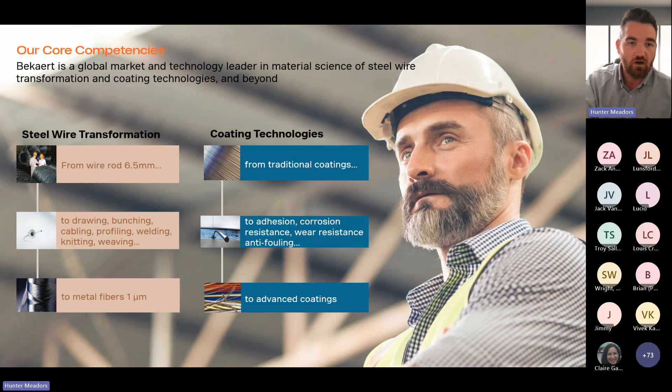Some of the biggest are in tire reinforcing, so the steel wire that is in tires for your cars. Bekaert does a lot of that, to the tune of about a third of all the tires on the road globally have Bekaert wire in it, all the way to the construction world where we all operate in the steel and roadway reinforcing, plaster reinforcing, masonry reinforcing. I've got a slide on that here briefly. So all over the place, all steel wire transformations.

To give you a little bit of the scope and size of Bekaert, in 2023 we reported consolidated sales of close to $5 billion with an EBITDA of 434 million in 2023. That's operating in 130 countries with 75 production plants scattered throughout and about 24,000 employees around the world.

How that shakes out on the map: here in North America, we have 9 production plants. We also have some offices scattered throughout the United States and Central America. And we have one manufacturing plant in the US that specifically manufactures our Dramix steel fibers, which is relating back to the tool. That is the steel fiber choice that you're going to have when you're designing in the tool. We do have a manufacturing facility in Tannersville, Pennsylvania, sort of the Scranton area, that manufactures our steel fibers there.

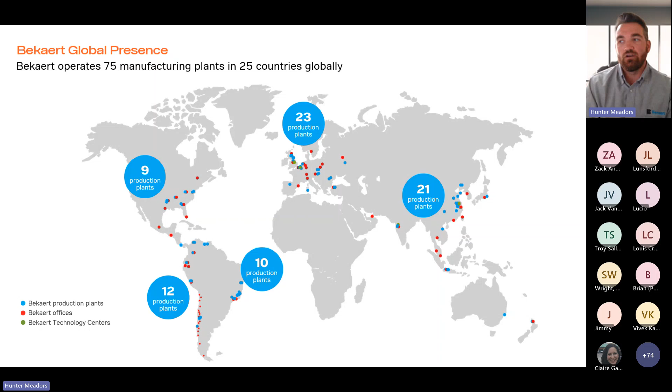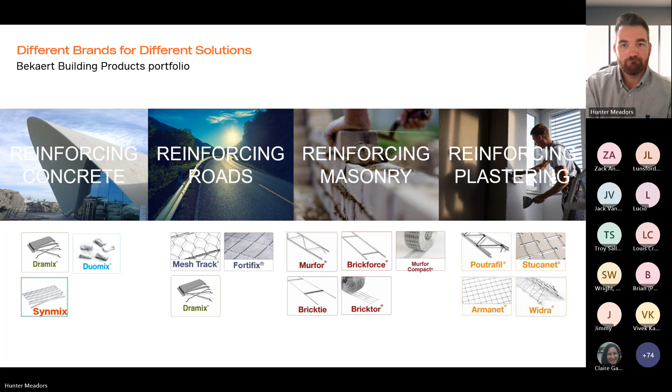Now, I mentioned that the construction building products portfolio of Bekaert is not just limited to reinforcing concrete. We also can do roadway reinforcing, masonry reinforcing, plaster reinforcing, and the like. But this tool that we have rolled out to the market specifically revolves around Dramix steel fibers for reinforcing concrete applications. So with that, let's talk a little bit about Dramix steel fiber concrete.

So the principle of concrete reinforcement, we're taught this if you took concrete classes back in college. You're taught that concrete is very brittle and is not really worth anything when it comes to carrying tensile stresses and tensile loads. It is very low ductility. When it's subjected to those tensile stresses, unreinforced or plain concrete will ultimately crack and fail once the loading exceeds the cracking moment of the concrete.

So how do we change this, right? Well, we add some level of reinforcement to the concrete matrix. This could be either a mesh, this could be a rebar, or in our case, steel fibers added. Our goal there is to simply increase the load-bearing capacity as well as limit the crack opening of the concrete. That is our goal for adding reinforcement to an otherwise very brittle material.

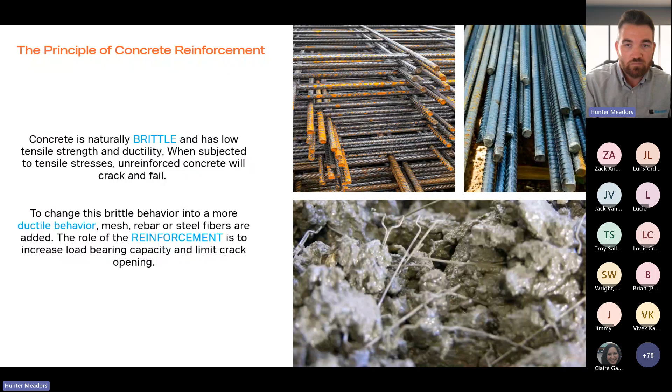Now, steel fiber reinforced concrete is a concrete that has a homogeneous distribution of randomly oriented, discontinuous, discrete steel fibers. What that means is there's a bunch of individual fibers anywhere from 1.5 inches long to maybe 2.5 inches long, scattered throughout your concrete section, oriented all different directions, and you achieve what we call 3-dimensional reinforcement. The entire length, width, and depth of your concrete matrix has reinforcement throughout.

Now, when you're talking steel fibers, this is a direct swap, steel for steel, fibers for your typical steel wire mesh or your rebar. But you're going from a continuous reinforcement in the case of rebar and mesh to discontinuous. The fibers are individual pieces, again, a couple inches long, scattered throughout your mix with an even distribution everywhere throughout the concrete. And that is the design principle and basis that the tool is using in its designs. So that is, in general, the big picture. What is steel fiber reinforced concrete?

But when you go to design, what we're trying to find ultimately is the bending moment capacity of our concrete sections to carry the loads, whatever we're trying to input into this tool, so that our projects go off without a hitch. So how do we go from evaluating concrete with fibers tossed in to ultimately providing bending stress values for you to be able to stand by your designs?

Well, we cast a bunch of test beams with our steel fibers in there. And along with some ASTM tests that we do run, the industry standard in our world is the EN 14651 beam test for flexural strength of steel fiber reinforced concrete. The EN 14651 test is a simply supported beam. It is loaded at the midpoint. And if you notice on the picture there, there's a notch that is sawn into the bottom of the beam.

What we're doing there is we're ensuring that ultimately we want it to crack there, but we are also going to take that notch and we're going to measure it as we load the beam, and that notch is actually going to open wider. It's going to displace. So we take readings of the corresponding stress that's being applied to the beam. We take the reading of that stress at benchmark openings of that notch.

They're in millimeters. I'm trying to get them to switch to the good old US units. It's a tough sell, but in 0.5 millimeters, 1.5 millimeters, 2.5 millimeter, and 3.5 millimeter opening displacements, we measure what the stress is corresponding to that opening. Those give us what we call our FR values. There are 4 that we gather, one at each of those benchmarks.

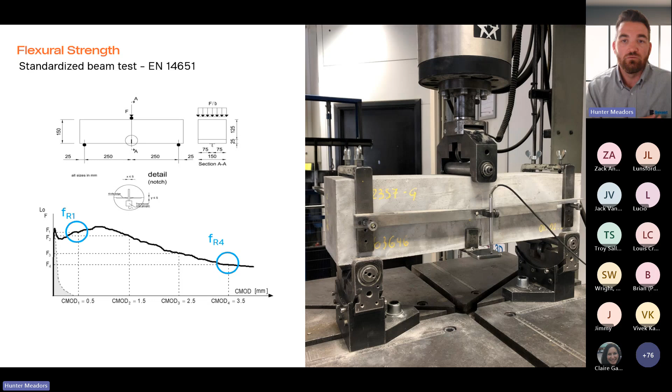So we take those values and we measure them amongst the different fibers that we have in our portfolio. We've had the 3D fiber. If you've been working with us for more than probably 2 or 3 years, you've heard us talk about the 3D fiber. Maybe years ago, you even had projects with our 3D fiber. It's been on the market in the US since roughly the 70s. We've been using the 3D steel fiber in the United States for decades.

Along the way, we've innovated and we've bettered our product portfolio. We've bettered our steel fiber line. And now we have the 4D and the 5D steel fibers. And so what I'm showing on this graph here is a comparison in essentially your load displacement of each of those different fibers and illustrating what those strength differences are.

The biggest thing between the 3 fibers that you'll notice first is the 3, 4, and 5 correspond to the number of bend segments at the end of each fiber. The 3 has 3 bend segments, the 4 has 4, the 5 has 5. Among many other things, that's kind of the biggest difference between them.

But our 4D fiber has become our workhorse fiber, we like to call it. The lion's share of our projects in the last 24 months have been with our 4D fiber, as it is designed for optimal crack control and strength. It really combines kind of the best of all the worlds, and most of the demand that we need to achieve can be captured with the 4D fiber.

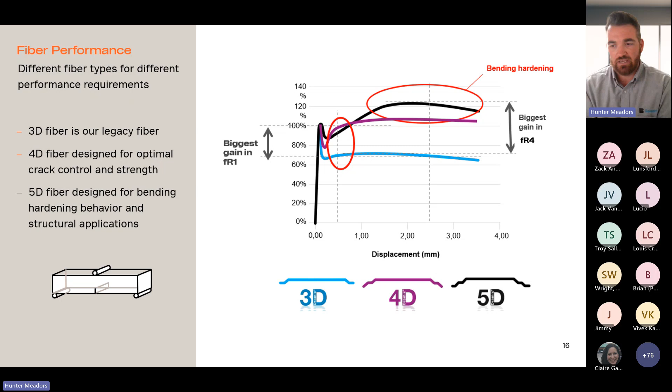So long story short, we cast these test beams, we run them through the beam test, we get all these FR values, right? And then ultimately we're able to determine the sectional moment capacity of our concrete using these test values. So we've gone from casting concrete beams to actual values, flexural capacity values that we can then provide for our designs in the online tool.

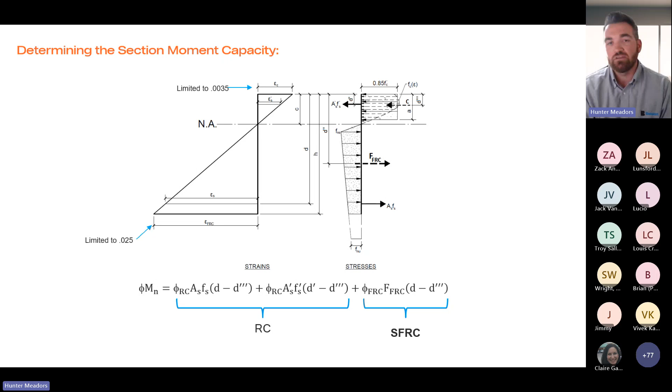There again, it goes back to one of the first slides I introduced with. You have reinforcing in your entire length, width, and depth of your concrete section. Therefore, you have tensile capacity everywhere south of the neutral axis. And in the case of having some additional reinforcing, the principle of superposition applies. But in the case of a fiber-only design, you still count on having that tensile capacity everywhere south of the neutral axis.

So let's briefly hit on the design fundamentals of steel fiber reinforced concrete. Let's take a slab, just a plain concrete slab. And remember, concrete's a very brittle material. So no reinforcing, plain concrete, let's load the slab. The slab's going to be able to carry the loading up to the point in which the slab finally cracks.

And in a plain concrete section, once the slab does finally crack, you no longer have any moment capacity through the crack of that slab, right? The post-crack flexural capacity is 0. The first crack is the last crack in a plain concrete design.

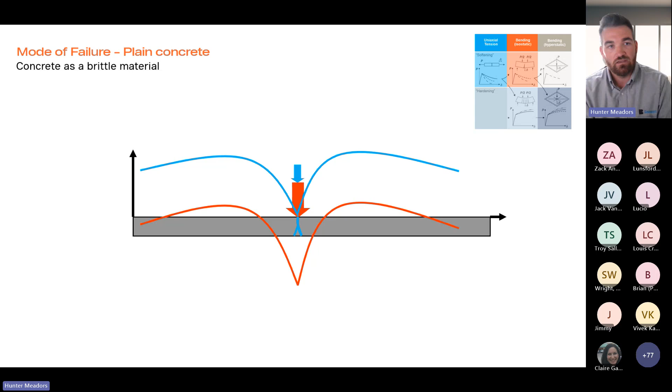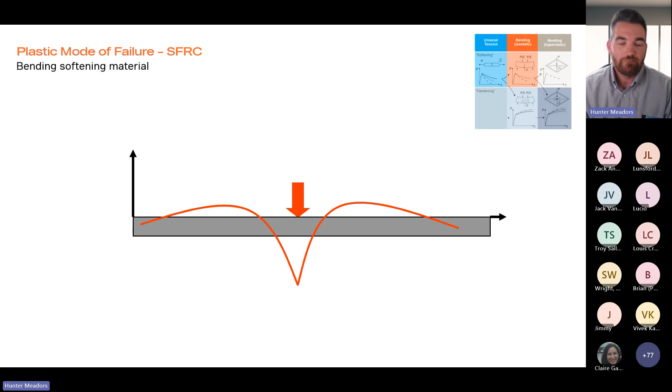Now, how does that differ from our steel fiber reinforced concrete design? So we actually look at this in a plastic analysis lens. Same slab, and we start to load it, okay? We like to say the fibers are asleep until that first crack occurs. They're really not doing much until the slab finally cracks. So we load it. Finally, we get that first crack that starts to form, and then we say the fibers wake up and go to work.

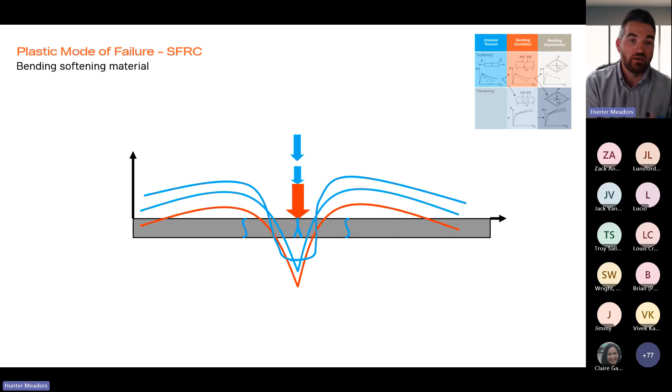Now that that crack is there, the fibers will then start to redistribute those moments that are being generated in the slab due to the loading. It will redistribute those moments to the top of the slab. And what you'll find is the formation of these yield lines or cracks, also plastic hinges, that is going to redistribute those moments in the bottom and top of the slab section. That then allows us to be able to utilize much more of the capacity of the concrete rather than a typical elastic analysis would allow.

So if we briefly take a look at both of those options, an elastic versus that plastic or yield line theory analysis for your slab. Well, we're going to determine demand moments in 2 ways, right? From your elastic calculation, you might run a finite element model, gives you your demand moments due to the loading. But what it's not going to do with your concrete slabs, it's not going to consider the redistribution of those bending moments. Therefore, it's going to lead to an inherently conservative design approach when you're talking about a steel fiber reinforced concrete section.

On the flip side, when you are using a plastic calculation or the yield line theory that our tool is based on, it is going to consider the redistribution of those moments from the bottom and top of the slab. And it allows the steel fiber reinforced concrete to utilize that bending softening behavior. And it allows for more capacity to be utilized in these loading scenarios rather than your elastic design. It's an iterative design process.

There's a large number of parameters that must be inputted, not limited to just thickness and compressive strength and fiber type and dosage, right? There are soil characteristics, the friction between the slab and the soil, the subgrade modulus, the geometry, the loads and load locations, whether the loads are dynamic or static, right? There's all these different factors that you're going to be able to input into the tool that's going to spit out the best design, taking all these things into account from a plastic analysis perspective.

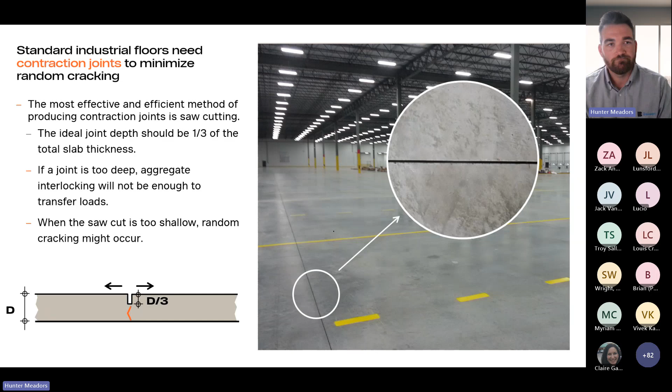Now, the advantages of saw cuts are great, right? Consistent joint dimensions, same width and depth at each cut. When a contractor is really on their game, the cuts are nice and straight and clean, good looking. Panels are all the same size, good looking, cost effective concrete placements, right?

And we're not really limited to the size of the concrete placement because we're going to relieve the slab every, let's say, 15 feet each direction or 20 feet each direction. So as much as we can place and finish, we're going to be okay. And we're going to minimize random cracking with the saw cuts. So it is a really great solution still out in the market.

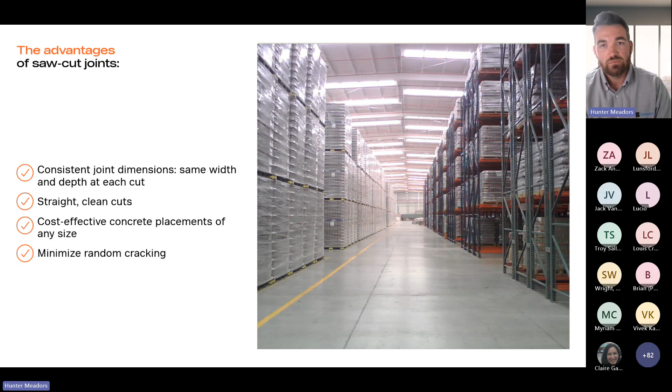Some possible problems with those traditionally jointed saw cut floors, problems that ultimately lead to a negative impact on your floor, could be any combination of the items I show here. Cracks, curling, rocking slabs, spalling joints, poor load transfer. Any one or a number of these things could occur in a traditionally jointed floor.

And any one or a number of those things could lead to high repair budgets for the floor, high repair budgets for any equipment that you're running on the slab, could lead to reduced operational productivity, reduced property value, increased healthcare costs for operators should anything bad happen while they're going over the joints in their equipment.

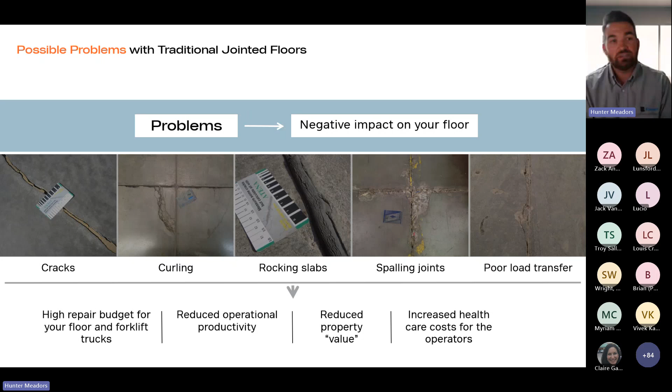Right? So these are all things to keep in mind as you're out there designing your typical saw cut slabs in our tool. We may need to bring those up to the owners, to the design teams, and say, hey, have we thought about X, Y, and Z potential issues that could happen in the future? Now, our tool does have functionality to mitigate a lot of those concerns.

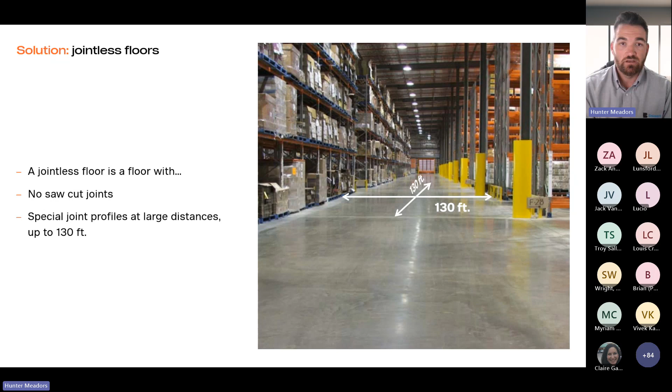The second most common floor type, I would say, in the United States is a jointless slab. If we've come to talk to you in any capacity on steel fiber reinforcing and our position in the market, I'm sure we've brought up the solution of a jointless floor. A jointless floor is no saw cuts, right? We could go upwards of 130 plus feet in each direction with construction joints, no saw cuts necessary.

When you construct these jointless floors, the panels can be anywhere from 105 feet, let's say, to 140 feet, maybe even more in certain cases. And these construction joints are shaped using factory produced joint profiles with dowels installed and integrated protection for the edges of the joint. These are full depth doweled profiles that we recommend you include on your jointless slabs.

Now, why am I even talking about the jointless slabs, right? Our tool has functionality to design these. I'll talk in just a minute about the basic user and the advanced user of our Dramix Pro tool, but you can get into designing the jointless slabs in our tool. Now, what I want to stress, designing a jointless slab goes far beyond just getting a dosage and a thickness and joint spacing.

So while the tool, if you're an advanced user, and you'll see in a few slides, will allow you to do this, if you want to go down this road, we highly encourage you to reach out to us and allow us to put another set of eyes on things with you, help you look over details, help you plan so that you're giving your project the best chance of success.

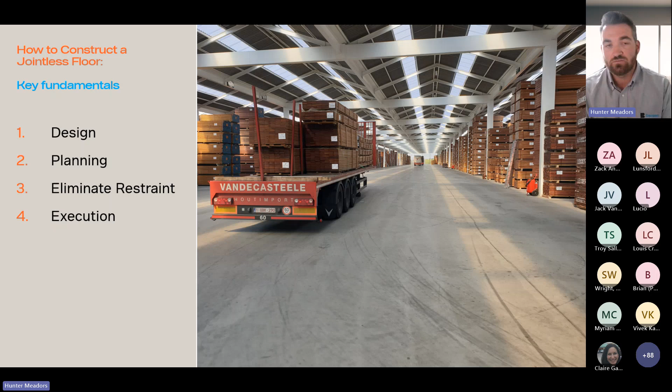I'm going to talk briefly then about the 4 key fundamentals for a jointless slab, but again, this is not going to do it justice. The care that is necessary on these projects is far beyond what we're going to talk about here today. The design, the planning, eliminating restraint, and execution of the slab are really the 4 key fundamentals for a jointless slab to be successful.

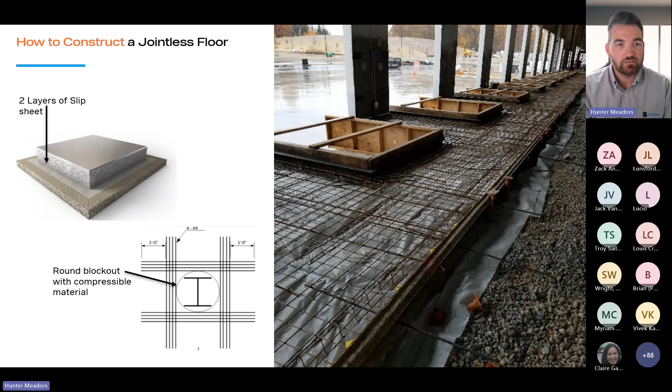So the design portion, we get joint spacings, a dosage, a thickness, and we feel like we're good to go, right? However, there are many other considerations, such as a double layer of slip sheet below the slab to ensure that our slab can float and shrink, and those shrinkage stresses aren't going to get too high if the slab is restrained. Anything that is going to cause restraint in the slab, such as columns, bollards, drains, truck docks, we want to make sure our jointless slab is isolated from those things. It really is all in the details when it comes to these jointless slabs.

So again, I want to stress to you that you can become an advanced user of our tool, and that allows you the functionality to design these more complex slabs. Highly encourage you get with your Bekaert rep just so that we can help coach you through some of these nuances, because there are many. It goes far beyond, again, just spitting out the output from our online tool.

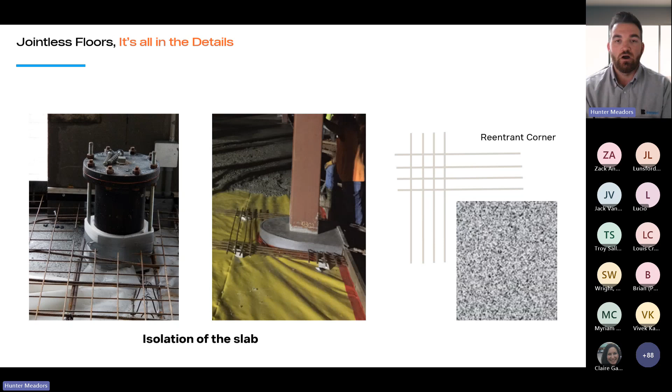So to briefly look at just the two flooring types that we discussed here, the saw cut slab, right, most common. Again, maybe 3 out of 4 of the slabs that will ever get designed in our online tool are going to be saw cut here in the US and North America. But for those more sophisticated solutions where you want to look at the jointless floor, there are some major advantages to a jointless floor, but there's also a very high level of care we must take as we go through designing those.

So now I've mentioned a couple times the basic versus an advanced version of our online tool. Both are free to use. Maybe I should start there. The basic version is going to have limited functionalities. You will still be able to go in and design a saw cut floor for just about any type of project you may have. If it's a saw cut slab, you can run a fiber only solution and check to see if you can get there, obviously inputting your loads, your soil conditions, things like that. That's going to be all day long in the basic version of our online tool.

There is an advanced version that then opens you up to those more complex slab solutions, right? We're going to hold that door pretty tight on who we approve essentially to be users of the advanced version. And we have many reasons for that. But we want to make sure that we're not doing anything that's going to set our partners up to get into a bind because we didn't coach properly enough before we approved somebody to be an advanced user of our tool.

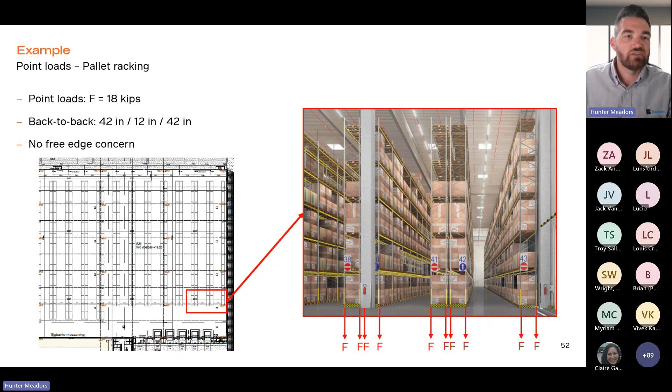So in this case, we're going to run point loads of 18 kips. We're going to have the racking back to back set up at 42 inches with a 12-inch gap and then 42 inches. We're going to assume in this case that there is no free edge concern. And briefly, the free edge of your slab is just the very outer extents of the slab, right? We would consider this edge, going off of this drawing here, pretty much a free edge. For our case in the design tool, we're going to assume that you can't have a fully loaded rack leg there. So we're going to say there's no free edge concern in this case when it comes to racking.

We're also going to have a uniform distributed load of 750 PSF. And we're also going to input a forklift wheel load of 6 kips per wheel with a wheelbase of 36 inches and a wheel pressure of 200 PSI.

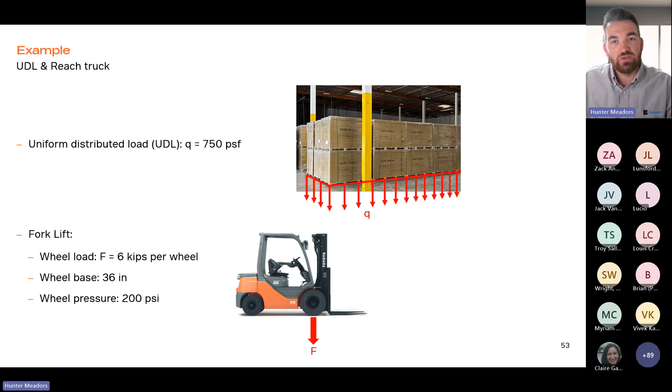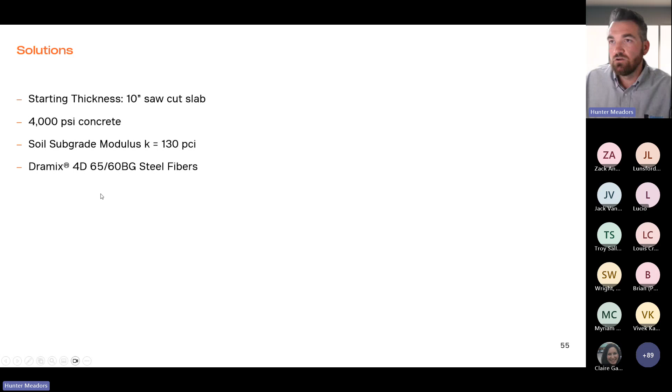All right. So with that, I'm going to close out of the PowerPoint, and now I hope you're seeing the tool. Let me back up to this screen here. Actually, this is the screen that you originally came to for Discover the Tool and register for this webinar.

Oh, by the way, I have another screen. That's why I'm looking over here. So if it looks a little goofy, if I'm kind of looking off to the side, that's why.

So we have a tab to discover the tool. We have a tab for registering for the webinar. If we go to discover the tool, it's going to ask you, if you don't have an account yet, to register. The registration is simple. Again, this tool is free. It is not a software that you download to your computer. It is an online cloud-based tool. All right. So once you register your account, you get your email and your password, and then it's a sign in.

And we're brought to your dashboard of where all your projects and your project folders will be placed. So this is our main screen. And as we get into the projects, you'll see this left-hand ribbon changes some, but these are my folders I have set up and different projects in there. So if I wanted to create a project, I would click here. Or if I wanted to add a new folder that I wanted to call webinar, save. Now I have a new folder down here for webinar.

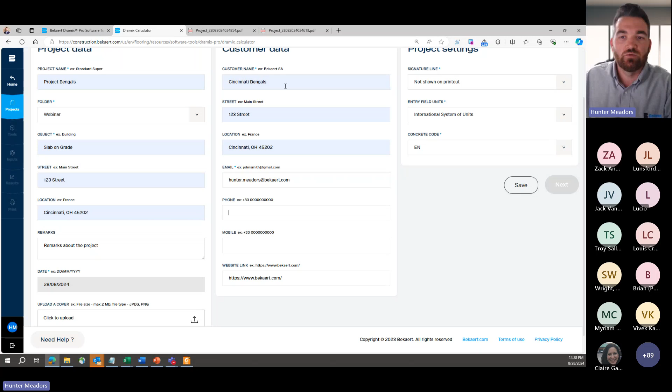The date should automatically populate to today, whatever day you're inputting this. You can also upload a cover. So this could be like a cover photo for your project. Then you enter in your customer data. So who are you creating this design for? I typed in Cincinnati Bengals, 123 Street, Cincinnati, Ohio, whatever the address is, and then the email of your contact. So since I don't have Joe Burrow's email address, I'll type in huntermetters@bekaert.com. Phone number, website, whatever you want to include for your customer. Remember, this is your customer who you're providing the design for.

Now your project settings, your last column here over to the right that we have to input before we can start to get into the tool. Your signature line is for your calculation report. We typically default to just not shown on printout. Your entry field units, well, this is the United States for probably most of us in here. So I'm going to click United States customary. And then for concrete code, I have different options here. So just a brief aside, this tool is for 130 countries around the world. While we operate in ACI 318, you're going to see things in the tool that you're like, that's weird, but it's probably being used in some other country.

So we've entered in everything. We've got our project data. We have our customer data. We have our project settings. Now we can go ahead and click save. You can't move on to the next step until you save this. So we click save.

Now this blue button for next is illuminated, and we can actually get to the next step and get into the tools. For today, we just have a tool, slab-on-ground, open for use on this website. In the future, our goal is to hopefully introduce some more of our tools that we are already using internally. But for today, the slab on ground is the only one that we've released for the market. So it's the only option you're going to have, slab on ground, blue button next again.

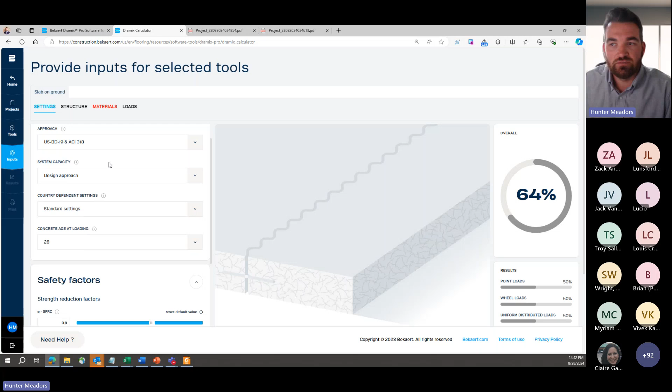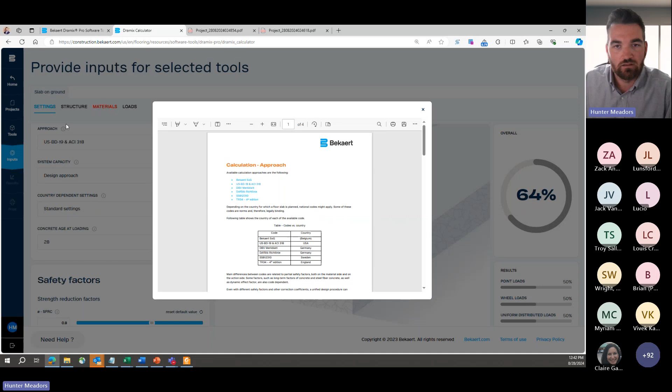The next one down is system capacity. We click that. Again, for the basic user, we're going to just leave it as design approach. There are some things that could mean different things in different countries, right? For us and for the basic versions, we're going to leave design approach. I should mention, there's these eyes that you can click that will have some information on what each of those selections means. So I click the one for approach up there: for the US BD19 ACI 318, country USA. Bekaert SOG if you're operating in Belgium, right? DBV if you're in Germany, etc. So you can get some information on what those inputs are by clicking that little eye with a circle around it. Info button. Our country dependent settings, next setting here, USA, right?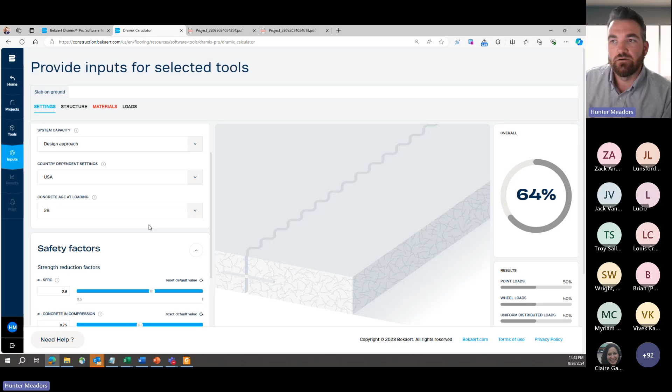Concrete age at loading. We always default to just 28, right? We're going to assume that it's going to be 28 days of set before we're going to load the slab. Our next section is where we're going to input our safety factors and our load factors for the project. And I should note, just because we're filling this out now doesn't mean we can't come back and edit it once we get into messing with the tool. You can click between these tabs at any time when you're running your design. So don't feel like there's a workflow that you must follow. But it's here, safety factors.

We have our strength reduction factors. So all of our designs default to a strength reduction factor, as you are used to with any of your phi factors that you use in your designs, 0.9 for your bending and your shear phi reduction factors. We do the same thing with our steel fiber designs, right? And then we also have load factors in which we amplify the loading that gets provided, typically 1.2, but could be whatever you determine. You are the structural engineer of record for your project. So you can adjust these load factors anywhere from 1 to 2, however you see fit. We typically default to a 1.2 load factor for our loads, unless we're directed otherwise by the structural engineering team.

So we've entered in what we want to enter in here. It's a really good practice to click save very frequently when you're operating in our tool, because it's so easy to jump between tabs and jump between entering information, and you forget to save, and for whatever reason it doesn't save, and now you've lost a little bit of that input that you've done. It's very easy to forget. So try as best you can to get into a habit of clicking save and locking in your inputs as you go through. So that's our settings tab. We'll click over here to the structures tab. It doesn't default to jointless.

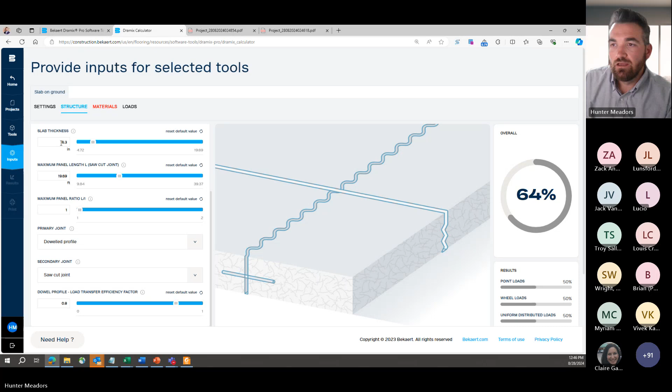All right, now we're into slab thickness. These boxes you can click in and hard code any of the values. You can also use the slider, but personally, I think it's just easier to enter in because you can kind of see I can really only get between 9.95 and 10.10. So I usually just double click in there, click 10, and we're off to the races. So on a 10-inch slab, again, we're saw cutting. For panel size, let's assume 20 feet. 20 feet's a good number for our panels. So we'll drop 20 feet in here.

And then we have a maximum panel ratio that we can input. If I knew that in every case my saw cuts were going to get cut 20 by 20 everywhere, clean as can be, sure, I would be inclined to leave this at 1. But just on the off chance that one of them gets cut 21 by 18, 20 by 18 and a half, something to that effect, I typically drop in a 1.25 for my panel ratio. That way I have a little bit of give in the event that there's a panel that's not exactly square 20 by 20. Just practice that I've done. Again, you're the engineer of record on this project, so ultimately your choice.

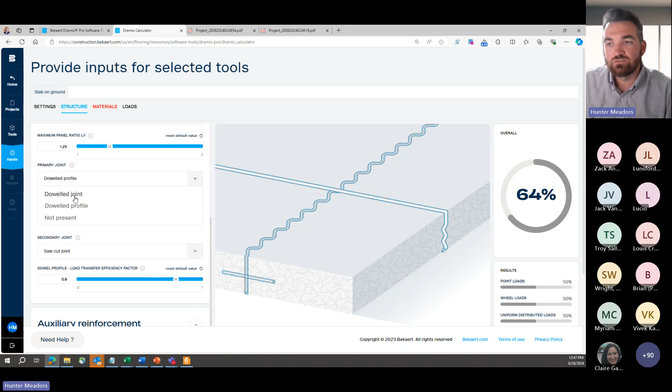Your primary joint. For a typical saw cut slab, our primary joint, we default to a doweled joint. Could be a smooth dowel, could be a plate dowel, could even be a diamond dowel, but it's going to assume just a typical doweled joint. And our default load transfer efficiency factor is going to default for this case to 0.7. 0.7 for a doweled joint.

All right. Our secondary joint is a saw cut slab. The only option is going to be a saw cut. That's our secondary joint. It'll be important to note that once you get into the load portion and then your calculations, when you are seeing references to primary joints and secondary joints, the primary joint is talking about your dowel joint. The secondary joint is talking about your saw cuts.

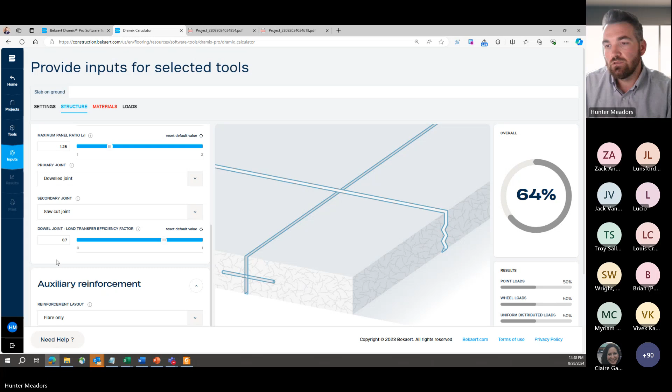All right. For your auxiliary reinforcement, and this is not for the basic version, this would be an advanced version question. Do you have some other reinforcement you're including? In that case, you can drop that in, whether it's top and bottom, double mat of something. For the basic user versions, you're only going to have a fiber only option there. So we'll leave that at fiber only. And now we're down to our sub base and subgrade.

So if you go back to my slides, maybe you saw all those slides all over the place. What the heck is all this about? I'm trying to illustrate all of the different components that get inputted into this tool and spit out a very detailed calculation report. There are many, many factors that go into this, far beyond just a thickness and a dosage of steel fibers. So now we're down to subgrade, subbase.

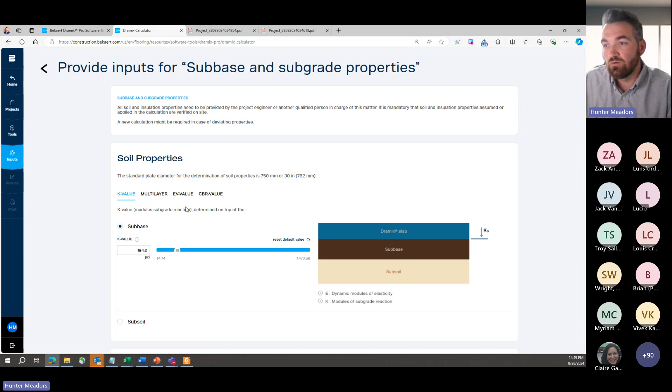We're going to click in here for the soil model. And I have some different values here I can go through. For your basic user version, you're only going to be limited to your K value. And for most of the projects we deal with, that's sufficient. If I think back to my slides, I said 130 PCI for my soil modulus. So that's where I enter that. If there was an insulation layer or something like that, I have the ability to include that. Most of the time, I'm going to leave that at none.

After I finish entering any values into any of these tabs, if you scroll down and you see the blue back button, I personally think it's good practice to use that button rather than clicking back off the ribbon here or clicking this arrow, just in the event that something doesn't save. I've found that when you do click the back button, you really mitigate any kind of those concerns. So just a little best practice that I personally have noticed.

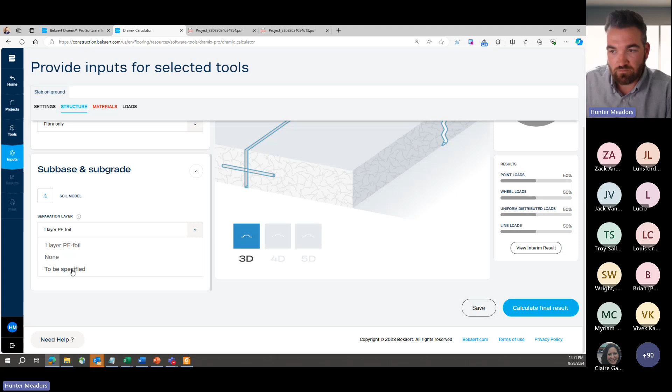Now we have our separation layer we have to call out. I have a few options here. I have one layer polyethylene foil, which just means slip sheet, right? None or to be specified. I typically leave it to be specified personally. If, again, as the engineer of record, you know differently, you can put none, you can put the one layer. We usually default to be specified.

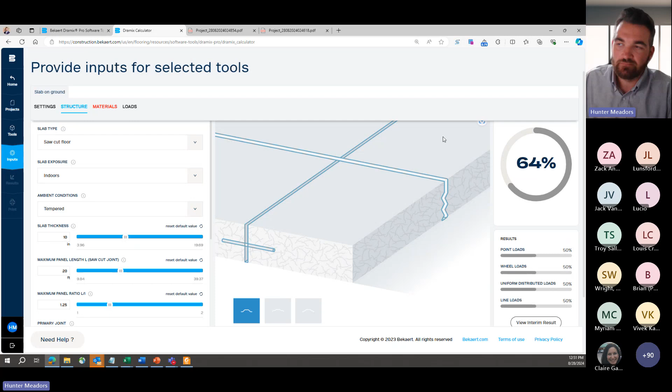As I mentioned, now that I'm done entering in all this information here, really good time to click save. Locks everything in. Now we can move on to our materials tab. And I'm sure you've noticed our nice graphical representation of our slab has changed as I've changed the inputs. Now we've got the dowels in there, we've got the saw cut in there, right? So now we're over to the materials tab.

Concrete class. It's going to look weird because it defaults to C25-30. Click in there, it's all PSI, right? So we said 4,000. I'm going to drop 4,000 in. Now we're into fiber type. We called out a 4D 65/60 BG steel fiber. That's this one right here.

All right. This is the most common fiber being used in our projects in the United States today. We have other fibers in here. This is the one that is certainly the workhorse fiber of our portfolio as of today. So I'm going to use that fiber. You can see it changes this to 4D. And now we have the purple fibers in the slab. You can actually see if you look close, it's a profile of the 4D fiber. You can see the extra hook on the end of the fiber.

Now we're at calculation type based on dosage, residual strength, and performance class. Leave it dosage. With those other options, we can input the FR values, but you have to have the FR values to input those. And I'm not sure even the basic user version is going to be able to access these. I think you're probably just going to be limited to dosage, but if you're not, I would just always default to leave it on dosage and go from there.

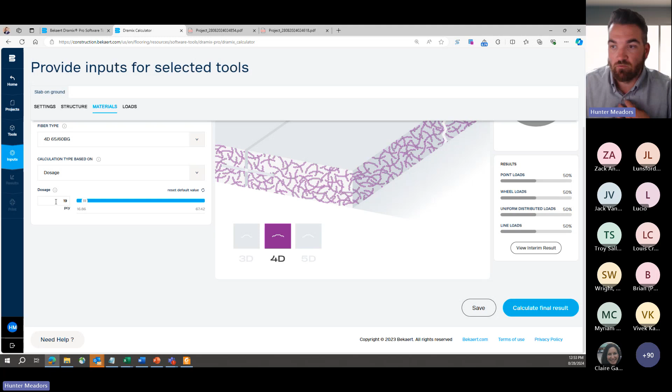All right. So 4,000 PSI, 4D 65/60 BG, dosage, and then here's where we input. Again, it's got another slider. You can slide your dosage. I don't like doing that, so I click in here, and we're going to start with 19 pounds per cubic yard. Now, why 19? If I've met with you or helped you design projects in the past, I've probably mentioned that for 4D 65/60, 19 pounds per cubic yard is our minimum dosage that we will recommend on a slab. It will allow you to go less than that in the tool, but it's our best practice and our minimum recommendation is 19 pounds per cubic yard.

So I think I clicked save, but I'm going to click save again. It's a good habit to get into, just to save all the time. All right, we're in the last tab now. Loads. This is where we input whatever we're given by our racking vendors, our owners that are going to be operating their forklifts, whatever they provide us, this is where it goes in. Let's start with the point loads.

So if I go back to my slideshow briefly, let me swing it over to this sheet here. I said we're going to run 18 kips, 42 by 12 by 42 with no free edge concern, 750 PSF UDL, 6 kip per wheel for my forklift, per wheel, remember per wheel, and a wheel pressure of 200 PSI. Let's go back to the tool and start to drop that in.

For my point loads, you can actually get pretty differentiated and pretty unique inputs here. We can do a single point. We can do 2 points in a line, 3 points in a line, 4 in a line, 4 in a rectangle, right? We have all these different ways we can drop these racking loads in. It's our experience that more than likely 4 points in a line are going to be the controlling load case. So I'm going to drop that in and run with that.

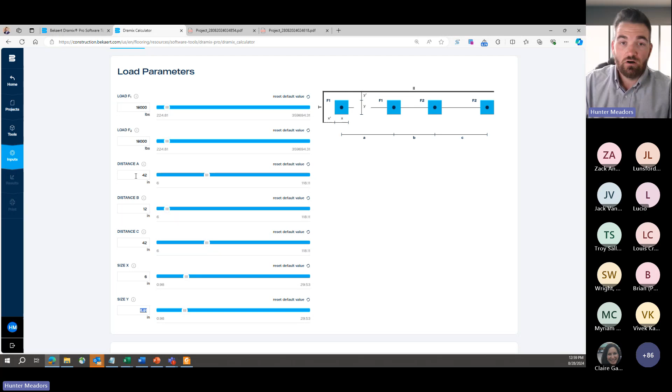This also tells you your distance A, B, and C. If we go back to the slides, we said it was a 42 by 12 by 42. So our distance A, we're going to set to 42. Our distance B is in between the closest spaced rack legs. We're going to say that's 12. And then our distance C is that last space. We said 42. I didn't mention what a base plate size would be. I'm going to default to a 6 by 6. You all are typically great at telling me what that needs to be, but I didn't list one out, so I'm just going to say 6 by 6.

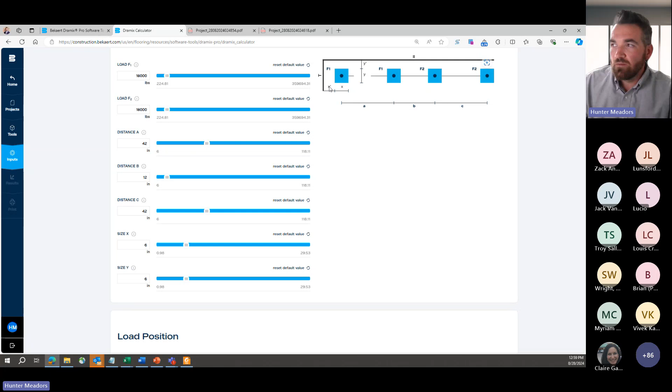Now, you can see that all of these values correspond to this graph. So you're able to see, okay, what do I mean by X and Y? Well, it's right here listed out. What about X prime, Y prime? As we go down and drop in the load position, that's where your Y prime and your X prime come into play. So we can set these racks a certain distance off of the joints, 6 inches, 12 inches, 24 inches, or we can leave this set to 0 so that the program assumes the loads occur directly on top of the joints, directly on top of the saw cuts.

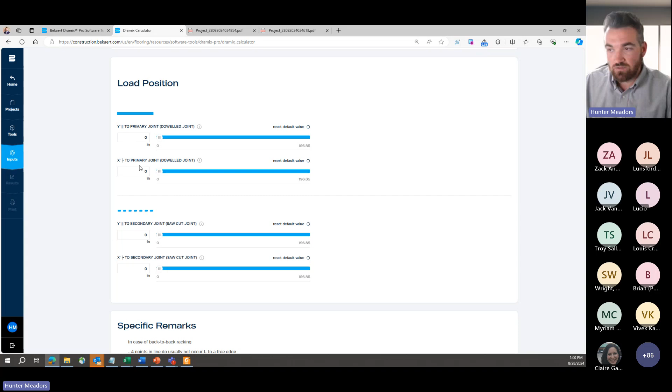You have the saw cut and the dowel joint here. We typically leave those set to 0. That way our racks can occur anywhere on the slab. We aren't limiting ourselves to where they can and can't occur. So with all that entered in here, 18,000 pounds, 42 by 12 by 42 on a 6 by 6, I think we're good with point loads. I'm going to click back. And again, good practice, click save.

So I'm going to save. Now I'm going to move on to my wheel loads. You can enter in a whole bunch of different wheel loads. We had a 1-axle, 2-wheel condition for a forklift. 1 axle, 2 wheels, all the same load positions, except now you have to think about, could my forklift ever drive out over the free edge of the slab?

Like, I don't know, out into a parking lot or a truck dock area? Most of the time that answer is yes. So we actually click every single one of these for your forklift wheel loads. We like to typically see every single one of those checked. Again, you just have to conceptualize, where can that load occur on my slab? So I'm going to check all of them.

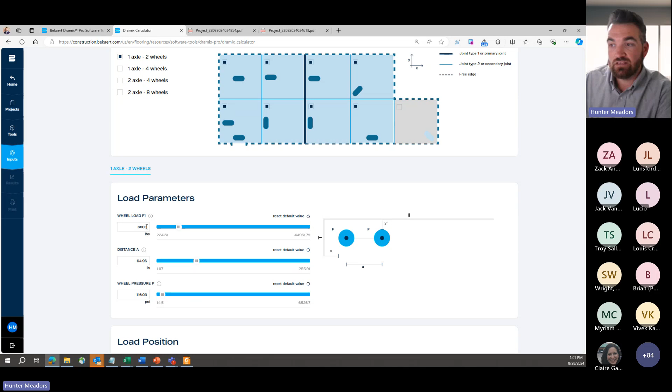My wheel load was 6 kips, 6,000 pounds. Again, this is entered per wheel. This is not your axle load, so keep that in mind. This is 6,000 pounds per wheel, so it'd be like a 12 kip axle. My distance apart was 36 inches and my wheel pressure was 200 PSI.

All right, good enough. Now I can call out where my load is going to occur as it relates to the joints and the free edge. Well, I'm going to set all these, just leave them at 0, because I want to be able to say this forklift is designed to go over any element of my slab, the free edge, the saw cuts, and the dowels. I'm going to click back.

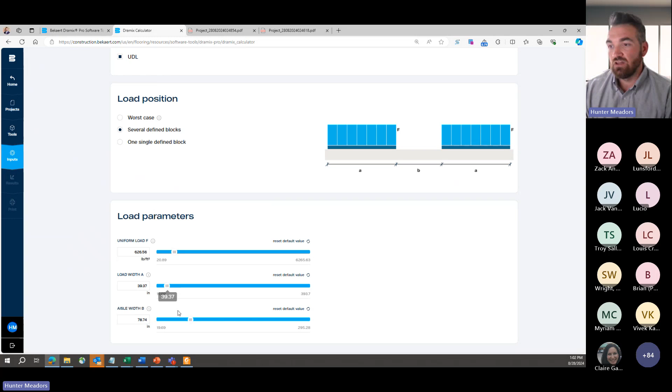Now I'm down to my uniform distributed load. You have 3 options. You have your worst case, which is the most conservative approach, which we're engineers, we love that. Worst case, you can look at several defined blocks where you can actually input the blocks and the aisle between them, or you can do one single defined block. We usually always go with the worst case. I said it was 750 pounds per square foot. That's what we default to. Again, you're the engineer of record.

This worst case is going to analyze 2 at the magnitude of 750 PSF, 2 separate cases at a certain width, and then an aisle between them. And what's happening there is it is trying to maximize the moment stresses, specifically the negative moment that's going to occur in this aisle due to these uniform distributed loads.

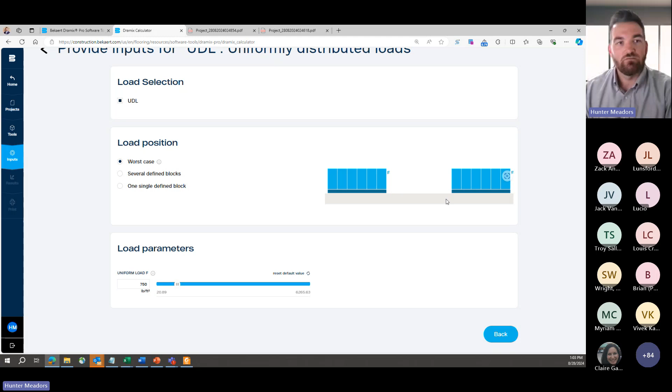So it'll actually show you in the calculation report. It runs through a bunch of iterations to see what truly is the worst case. And it'll actually tell you it's a 200-inch wide with an 18-inch gap between them is the worst case for this slab based on this loading. So you'll actually see that in the calcs. Click back. So we've entered in those 3.

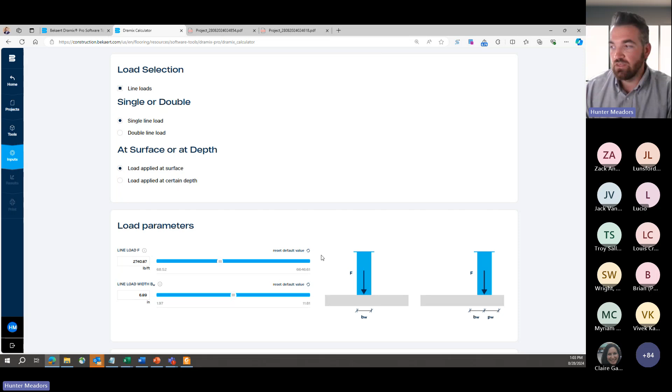I wasn't given any line loads, but your project may have line loads, right? There could be a partition wall that's got some loading that needs to be included, or maybe a CMU wall that's sitting on your slab that you need to account for. That's where you would enter this for those applications. You enter in a single line or a double line load. Is it applied at the surface or at a certain depth? Typically, we leave it at the surface.

Then you can set your line load magnitude, your width. Again, kind of picture a CMU wall, a block wall with a width of 8 inches, whatever it might be. And then you can apply it again to what locations. Slab center, always, is it going to hit a primary joint? Is it going to hit a secondary joint? Is it going to hit a free edge, right? Now you can kind of see the repetition here a little bit.

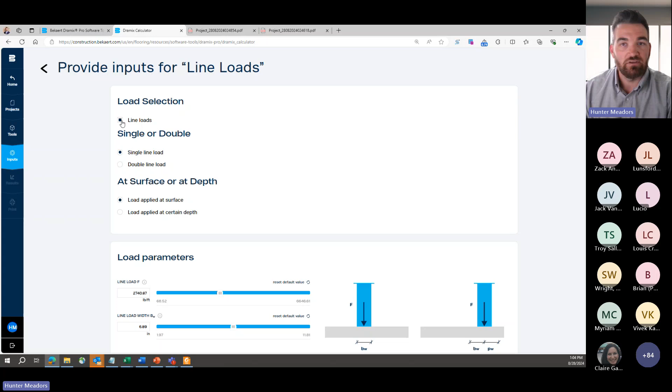I'm going to turn this off because I didn't set out any of these as a part of our design project. So to turn any of these cases off, you just click the square box at the very top of each of the categories. I click that, and now it's all gone. I'm going to click back. I've entered in my loads. I'm going to click save.

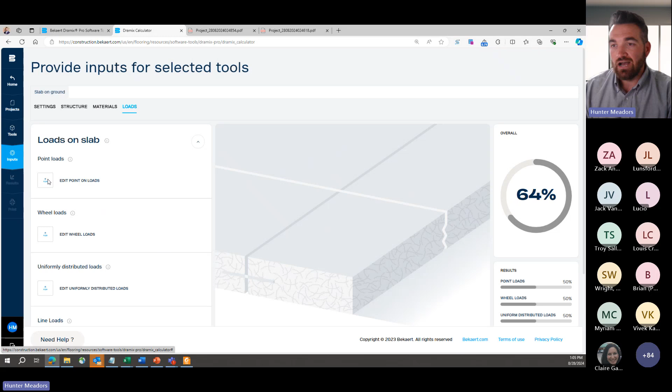Now I'm at the point where if I go to materials, I've got my dosage. If I go back to structure, I've got 10-inch, 20-foot each direction saw cuts. I got everything entered in, 130 PCI, got my loads inputted. I like to go back in and check just to make sure the loads didn't not save or something. If I go back in, 18 kips, 42, 12, 42, everything looks good. So therefore, we're at the point in which let's calculate final result.

This is running, give a little bit of credit here. This is a dense software. There's a lot that it's calculating, so it does take a couple minutes to produce the values and the results. And now we're there.

Now we're in the results view. We can see our point loads are utilizing the slab at 73%. Our wheel loads are only utilizing 29%. Our UDL is utilizing 57%. We didn't have any line loads, so it's 0 as it should be. You can go down and look at each of those represented by their load location.

So what's controlling the 4 points in a line design, right? It's the parallel to your secondary joint. So that's your saw cut, right? So that makes sense. The weakest point of the slab, controlling the design, 73% utilized.

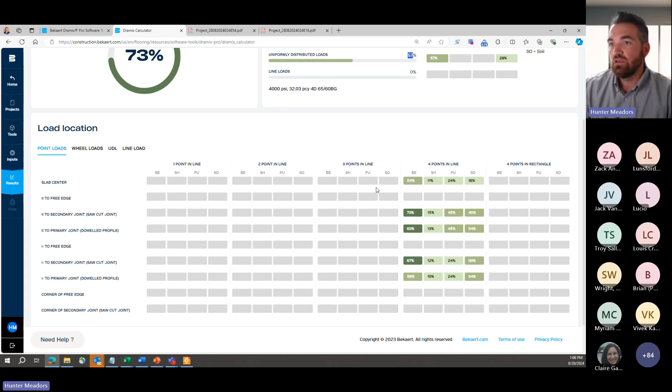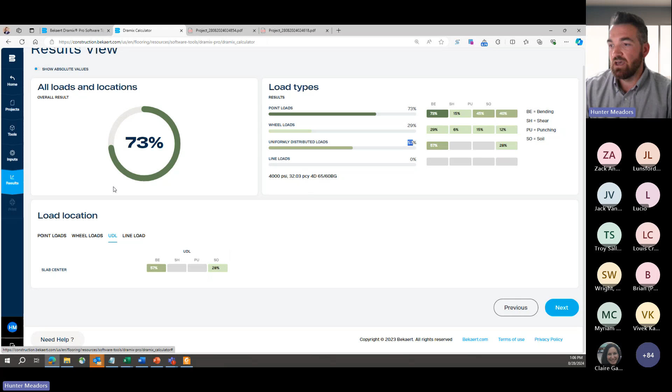We can click over to wheel loads. What's controlling our design there? What was the value? 29%. Parallel to your free edge, controlling the design for the wheel loads. And we can also do that for the UDL, right? The slab bending is controlling there. So we have all that information, and now we have a design.

That would be great. However, 73% sounds like we got some room to optimize the slab a little bit, right? So let's go back and see if we can't get a little bit more drilled in, sharpen the pencil with our design. So I'm going to go back to the loads piece. I'm not going to change anything. I'm going to leave these in. I'm going to go back to the materials. This is where I could do some editing. I could change the dosage, right? Which I will here in just a second.

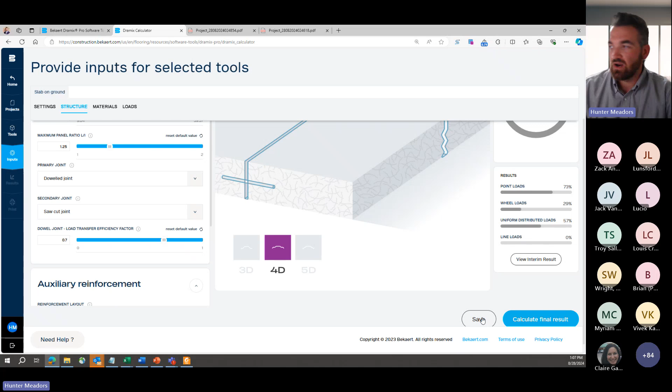But what I'm going to start with is going to the thickness of the slab. And I'm going to actually drop it, let's say 8 inches. Let's just see where 8 inches lands, right? So I switch that to 8. And what I can do, instead of having to go all the way to the end again, I'm going to click save because it's a good practice to do so. But I can view interim result. Again, it takes a minute to load. Sorry for the pause.

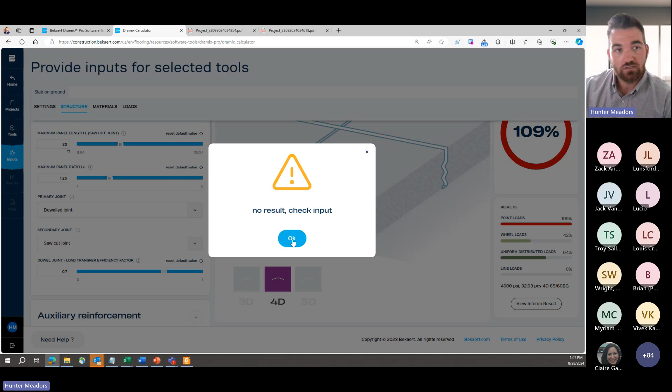So I have a red failure you can see on the right, 109% red failure, no result, check input. If you get something that's over 100%, it is going to say no result, all right? So we have to do some adjustments. We either have to change the thickness or change the dosage. I am going to modify our dosage. Just going to take a stab. Let's see what 33 pounds per cubic yard gets us with an 8-inch slab. Again, we haven't changed any of the loads or anything. I'm going to click save. I'm going to run view interim result.

And we work. So I took a 10-inch slab with a minimum Dramix 4D steel fiber dosage, took 2 inches off the slab down to 8, 33 pounds per cubic yard of fiber, so a little bit more fiber, but 33 is certainly a manageable dosage of fibers, and we're at 95%.

Our standard operating procedure is we cap at 95% for our designs. We don't want to run you out a design that's at 98, 99%, because we understand what Claire mentioned. We're structural engineers before we came to Bekaert. We understand there's some gaps, there's design changes in the future and things like that. So for us, we cap at 95%.

So for this project, I just optimized 2 inches off my slab, added a little bit more fiber, not a lot more fiber, but a little bit more fiber, and I can get there with that design, an 8-inch slab with 33 pounds per cubic yard. So that is what we call the optimized slab design there.

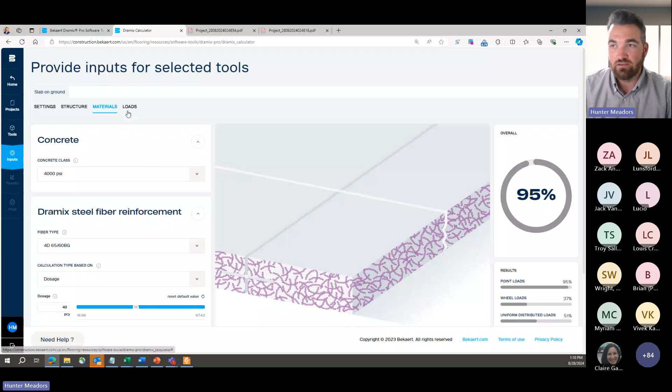So I'm going to drop that in, click save. I haven't edited anything else. I've just moved that dosage to 40. Loads stay the same. Now we're into the structure. So if you have the advanced version, this is where you can get in here, select jointless. And now a few things have changed. So we have to go through and check our inputs. Our slab thickness. Let's just start with 7. See where 7 goes.

Our maximum panel length. How wide do we want to check these panels? I'm going to put in 130. Okay, we'll just start there. Panel ratio, same spiel I gave earlier, same thing. I like to do 1.25 for this. 1.25.

You see this switch to a dowel profile. That is going to happen automatically for a jointless slab. We are going to assume that a doweled profile is being used, which also changes the load transfer efficiency factor up to 0.8 from 0.7. The reinforcement is fiber only still. Soil model doesn't change, 130 PCI.

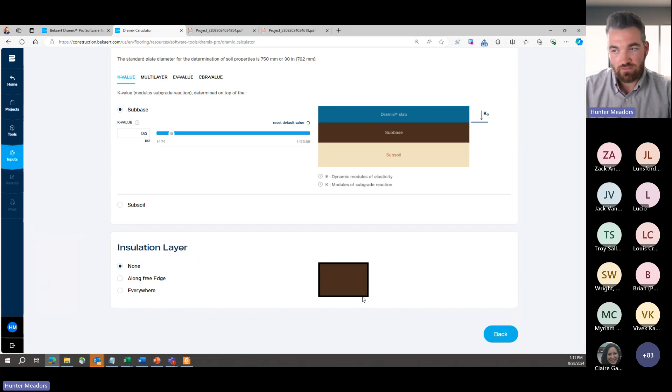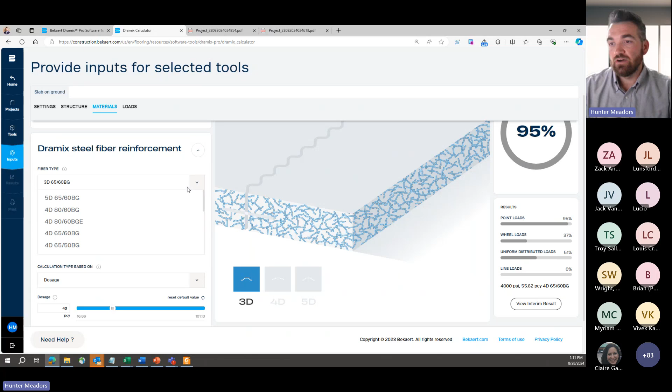Our separation layer on our jointless slabs, our best practice is 2 slip sheets below the slab. I'm going to select 2. All right. Everything looks good there. Jointless slab, 7 inches. Go to materials. Concrete class, 4,000 PSI. Dramix steel fiber reinforcement, 4D 65/60 BG, 40 pounds per cubic yard.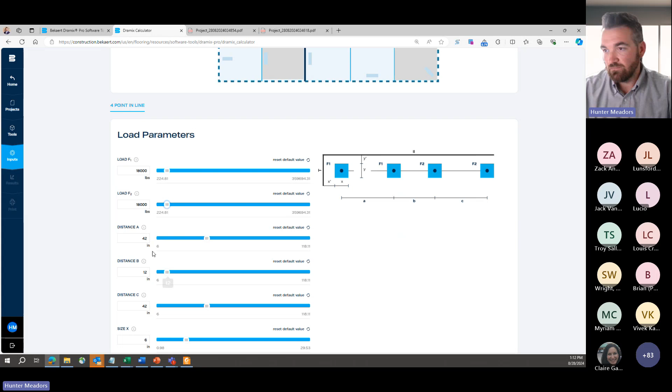Okay, going back and checking some of these inputs here. Some of these here, looks good. Click save. All right, loads, let's go in. So these loads, sometimes when you switch between slab types, the program goes back to some default settings occasionally. So I'm going to have to re-input this 18,000. No big deal. 42 inches by 12. See, that didn't change. 42 by 12 by 42. 6 by 6.

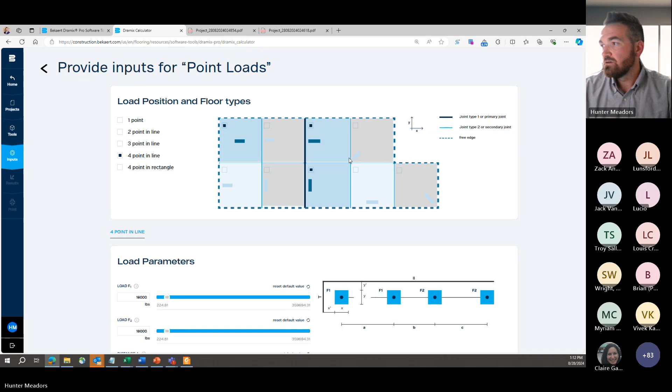Base plate. And then the load position, we're going to say it occurs not by the free edge, but by our primary joints and our slab center. So go down here. We leave that the same because we want to make sure the racks can occur right on there. We go back, check the wheel loads. The wheel loads reset. So we go back to 6,000, 36, 200 PSI. And we say that those can occur everywhere. So we've got to make sure these are clicked properly. Go back. UDL did not change, so that did not get affected.

All right. And there was no line load. I'm going to click save. And I'm going to calculate final result with my jointless slab, and we'll see how we go here. So with a 7-inch, 67.42 pounds per cubic yard jointless slab, all the same loads, we're at 82% utilized, which really means we could even look at going thinner if everyone was comfortable with it. But a lot of the times we don't want to go too extreme. So 82%, good value there, right?

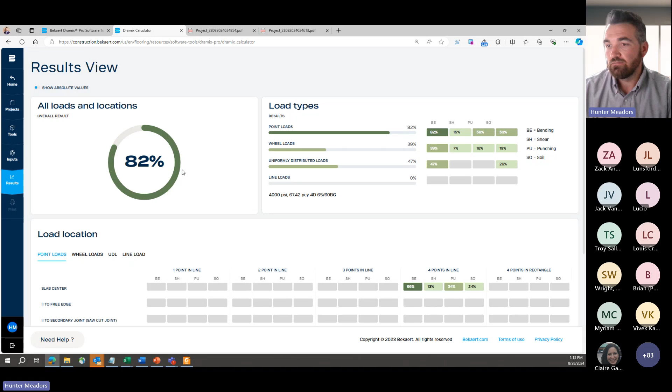And again, as you notice, there are no saw cut results anymore. We've eliminated them. So the weakest part of our slab, we eliminated that with the jointless design because there are no saw cuts. That is the process in which you take a slab, you run it through, you get a design, you say, hey, I want to optimize it, cut down on the thickness using the yield line theory, right? That's what this tool is based on. We optimized the thickness down in the first case to 8 inches, saw cut with a little bit more steel fiber. And then we took that and were able to also present a jointless option to our customer as well.

So we were able to provide 3 options, a 10-inch, an 8-inch, and a 7 at different fiber dosages, and the 7 being a fully jointless slab. It's a pretty awesome use of the tool. It's very much how we have always operated on our team. And now, once you're an advanced user, you have that functionality too.

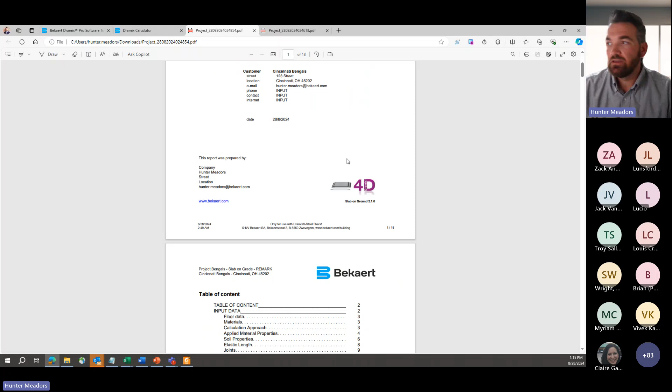So now we're into the printing of the calcs portion. Pretty simple here. We just always want to make sure we're English US units, because there's an English EN, and that'll be in metric. English US, right? There's 3 different types of printouts you can do. Summary printout, extended printout, or a complete printout. The summary printout is a quick, and I say quick, but it's an 18-pager, right? But it's got everything you need. It just doesn't go into all the nitty-gritty about how the tool is running the calculation. That's the summary. If I want the extended printout, print that.

That one, if I can get to it behind this bar here. Hold, please. All right. There's the extended. It runs about 29 pages, right? The full calculation report runs 100 pages. So when I go in and print the full calculation report, I go from 20 and 30 pages to 100.

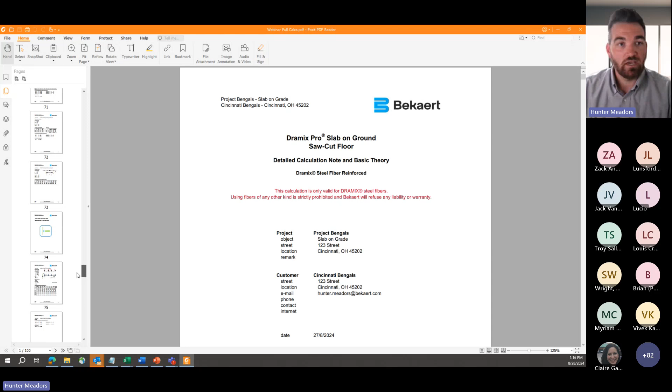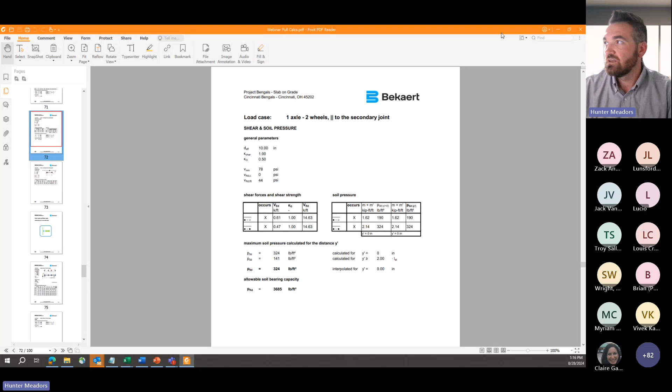It has everything in here, and it analyzes and spits out all of the results involved with every single load case. Shows every bit of the information in here. You know, I just clicked to a random page. I got my allowable soil bearing capacity based on my 1-axle 2-wheel parallel to the secondary joint load case. Right? It goes through every single load case and produces all the output for that specific load case. And then you combine all that together, and that's why you end up with 100 pages. As opposed to your summary set, which is going to give you all your basic information, slab thickness, joint spacing, dosage, which steel fiber, all that kind of stuff.

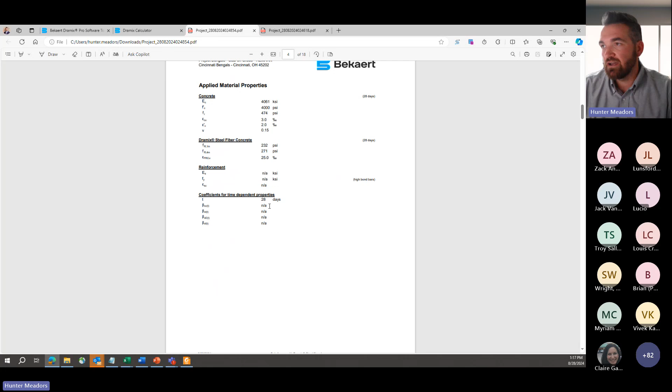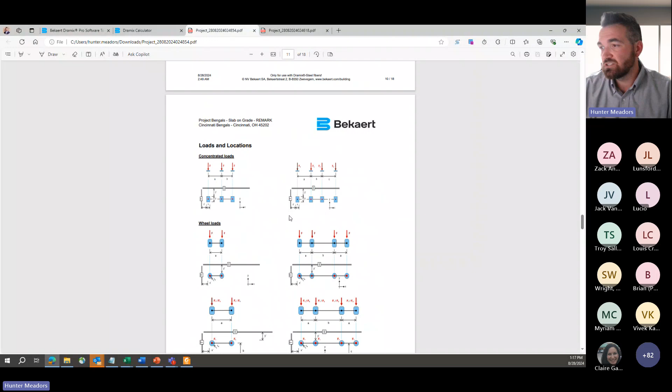Your applied material properties, so your load factors, all that information, all that good stuff's going to be in there. You can scroll down and look at your saw cut efficiencies. You can scroll down and look at your load applications. You can go in and see what forces were inputted, and then ultimately you're left with your results as far as your bending moments, your shears, that kind of thing.

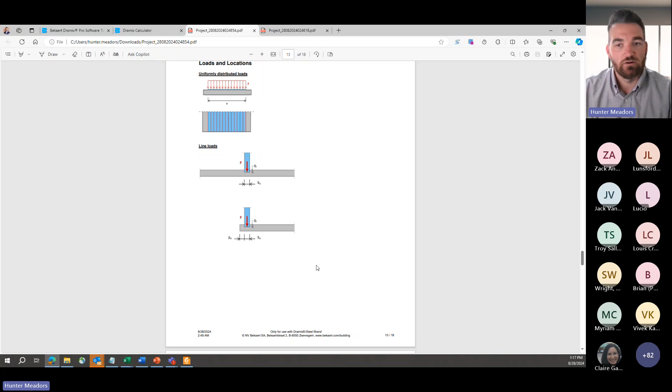So the summary is great. The full calculation printout has everything and a lot more than the summary. And the extended is your middle ground. It goes into just a little bit more detail. So if we go back then to our slides briefly,

we provided a saw cut solution, 10 inches, 19 pounds per cubic yard of fiber, 73% utilized. That sounds about right. We dropped 2 inches off. We're at 8 inches with 33 pounds per cubic yard of the same fiber. Got us to 95% utilized. That's the optimized design. Make no mistake in that case. 8 inches, 33 pounds per cubic yard is the right move.

However, if jointless was on the table as we ran this option, and it drove interest from the owner, and it was worth presenting, 7 inches, 40 pounds per cubic yard, 66, but I think it was like 82. So that value, I didn't update that, or when I did my practice run, something went different, but 19 pounds per cubic yard, I got a few asterisks here. 19 pounds per cubic yard is the minimum dosage of Dramix 4D 65/60 for saw cut floors. 40 pounds per cubic yard is the minimum dosage of Dramix 4D 65/60 for jointless floors.

And then the last one here is just the reduction in concrete, the reduction in inches off the slab. It's worth noting. For every 1 inch of concrete removed from your slab, you're going to realize roughly a 10 to 12% in your CO2 reduction. So you're talking about taking 2 and 3 inches off the slab. You're talking about 20 to 30% of a reduction in your CO2 as it relates to your slab.

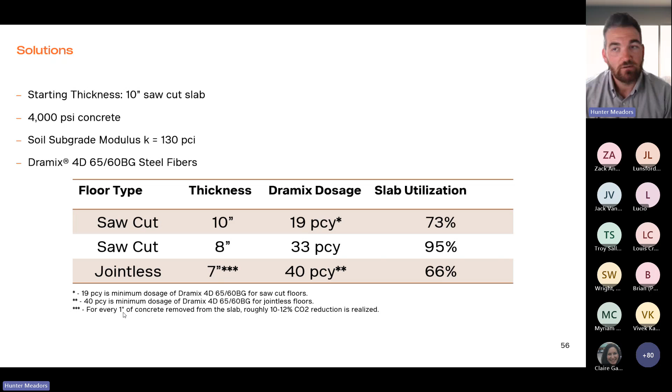And for those that have owners that sustainability is a big driver in their design choices, this starts to be very powerful. We can calculate the CO2 savings, the actual numbers, not in this online tool yet, but if you give us a design that you've created and you're comparing it against a thicker section or rebar, thicker plus rebar, whatever, we can evaluate that and provide those sustainability calcs for you. And that's extra firepower for your discussions with your owner in these cases.

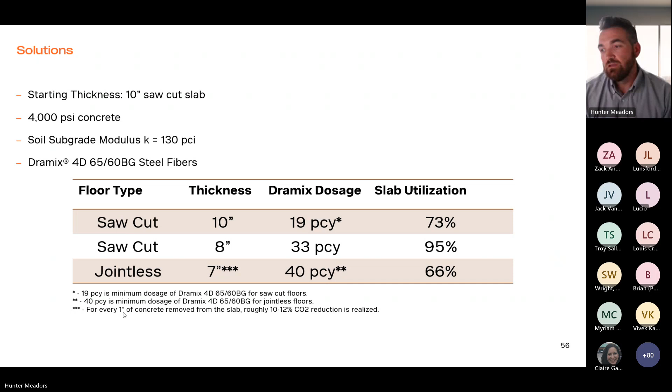So that was a lot. That was a lot of information. And I hope it was a good representation of how to use our tool, how you can expect to use the tool, what are some of the functionalities. I think it's going to be great for our market. It's going to allow for you all to get a look behind the curtain and see what we've been doing when we've been trying to work with you all over however many years and run designs for you and all that kind of stuff. Now you get to kind of see how that works and the processes we go through and how we provide you the most optimized solution.

Or in this case, we may present a few options, right? And show you could be light fiber, thicker concrete here, thinner concrete, a little bit heavier fiber here, get rid of joints, real complex kind of Cadillac premium jointless type of application as well. And provide those different options to your customers. And hopefully this is a really powerful tool in your all's tool belt as you guys are designing your industrial floors and your concrete flatwork anywhere. Remember, not necessarily limited to industrial floors, even though that's where we operate most of the time. There's certainly a case to be made that commercial and some light industrial, no problem at all on this.